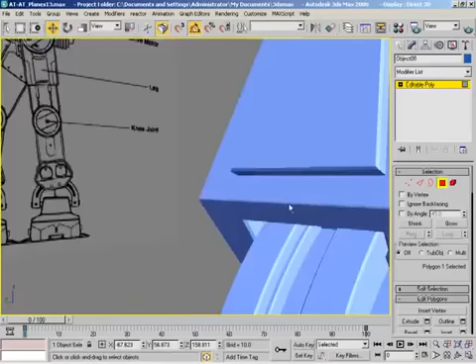Well, I can see you've done a lot so far. We have. You can see we've got the legs working all the way up there. There's actually an error in the feet that either nobody noticed or nobody's PM'd me about yet, but all the little teeth here inside the gears got shifted over to the right by a few units the last time we were playing with it.

How amateurish. So nobody has PM'd me and said, hey, there's a problem in your feet, which is pretty amazing. Not that people sound like that or anything.

They might do. So anyways, so here's what I want to do. I'm going to grab this panel, and we're going to planarize it, because I think it's a little bit out of planar. So boom, and you see a little bit of adjustment there. And this is probably not a good idea, but I'm going to do it anyway. We'll pull that out just a little bit to kind of fit things in. Looking at pictures and photos and things, let's see here, I've got my big stack of reference images, and this is actually the studio model. Now, it looks like what we've got is this great big armor plate that's more or less stuck to the side of this thing, and it comes out over the top, but it doesn't go all the way across. It just kind of cuts off right up here. So that's how we're going to model it anyway.

So in order to do this, let me get stuff out of my way. Let's grab this face and this face. I'm going to hold down Shift, pull these slightly up into the air. Clone to object is fine. I'm not going to worry about naming them right now.

I only name in paid videos. That's terrible. I'm just kidding.

Let me get out of sub-object mode here, grab this new piece that we've got, hit 2.

I've been working on the Advanced Digital Production class a lot lately, and I actually went through and named all the pieces of my model in that, and I was like, wow, I don't do this in a lot of videos, now I suddenly see why. I've heard both you and Jason lecture us so many times and name the various parts, and here you are. You should, but a lot of times, especially in videos like this, it's like, do you guys really want to sit here and watch me type names in? It's pretty exciting, I think, but I'm one of a very select few as far as that goes.

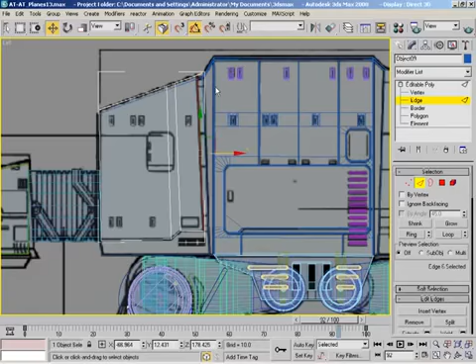Now this needs an edge. I think we could probably get away with just grabbing this and sliding it in a little bit. Now that's going to cause an interesting edge up here, unless we come up here and grab this vertex and slide it down too. And we'll clean this up just for good measure, not that it matters much.

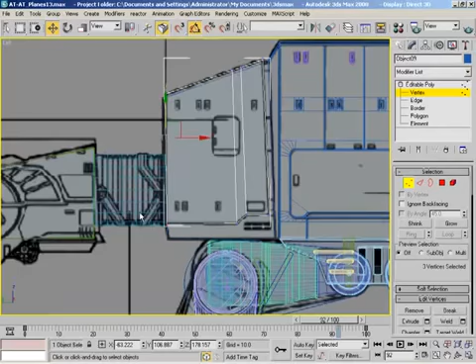And yes, that jump you just saw the viewport take was because I did try to just tap the Z key to undo, and you obviously can't do that in this Autodesk product. Other Autodesk products are available. Now, you're not going to turn this into a Maya commercial, are you? You're going to try, I can already tell. Yeah, here and there, you know. Yeah, just where it suits you.

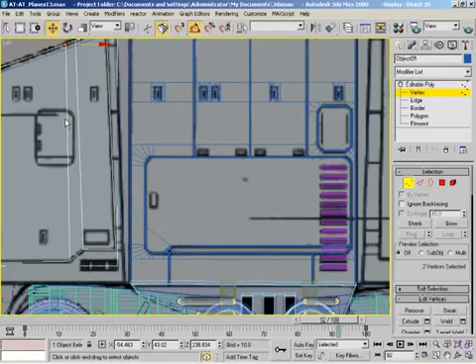Okay, now we've got this rounded door, and we actually created these earlier by doing some cuts and then some bevels and interesting things like that. But of course these edges are now going to get in the way, at least temporarily. So what I'm going to do is stop them from getting in the way for a while, and then we'll re-anchor them down later.

So let's connect these, slide down the connection edge a little bit. I'm not going to worry that it's a little bit out of whack right now. I don't think that's a problem just yet.

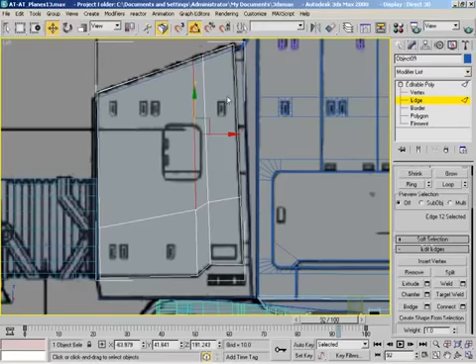Let's shade everything up because too many wires get visually confusing to me. I have a very low attention span at times. Say nothing.

All right, and I'm going to hold down Control and click Remove to get rid of those edges.

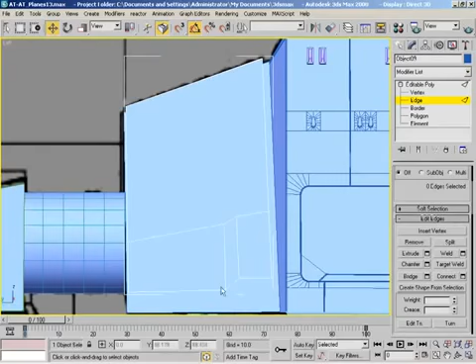Now, to create our little doorway here. I'm also interested in what that is, if that's a hole or what. It looks like just another panel. You'd probably build it on top of, like stick another shape in there, and that would work. It doesn't look anything special when you see it like that. Yeah, I was kind of hoping it was something special.

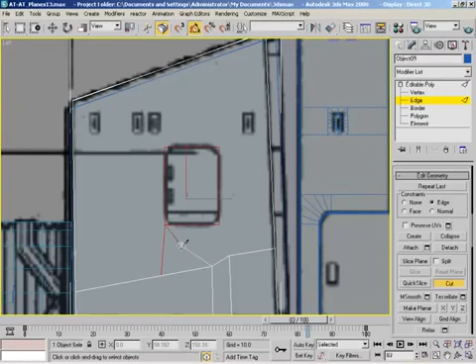Okay, well, we're going to get the cut tool. Let's see, maybe we could just start down here. It almost doesn't matter where. We're going to go to about where one of the corners would be, then to another corner, then one more corner. And we're almost done, then just click here, right click, and there you go.

Alright, so now I think with that done, we can switch over to vertices. I'll get out of the cut tool because I often forget to right click and then I keep the thing open, and that's just not good.

We're going to chamfer these by what is that? 2.19 now. 1.75. I want a number that's easy to remember because I still haven't done it to this corner yet. Can I do it to all corners at once, do you think? Is it going to mess something up?

It'll cause weirdness down there, but I can clean up the weirdness later. So let's just click OK, and then let's grab all of these again.

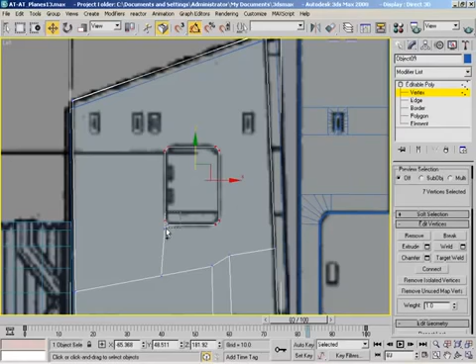I don't know why I wanted to open that. We just want to go to chamfer again. Okay, and of course, yeah, things are still looking strange down there, but we'll get to that in a moment.

Well, Ben, I'm glad you were able to make it down, even though you're just going to sit here and silently stare at me while I'm modeling, which I gotta admit is a little freaky.

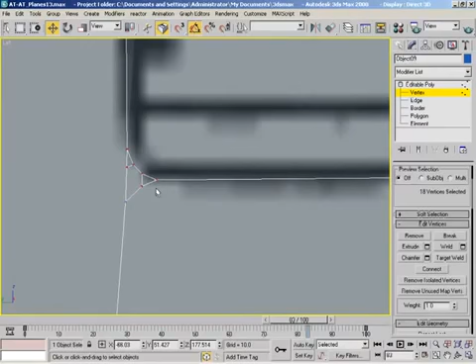Well, sorry. It's okay, you know, it's fine. There wasn't much to see as you did your thing there. Oh, for a second, I misunderstood you because of your awesome Scottish brogue. I thought you said there wasn't much to see, and I was like, oh, well, thanks. Just sit here and disrespect all of the modeling. That was going to be my second point, obviously. Of course, obviously. And thank you for that, really.

You're welcome. All right, so let's see. Let's take this and we'll remove that. And I'm sure we got a stray vertex here that we can...

Ooh, I don't want to do that necessarily. It won't let me take that one out yet. That's okay. We've got to anchor all of these corners down like what we did over here before things really start to work well for us.

For the time being, let me make sure the edge constraint is still on, and I'll slide this guy out of the way. Let's get the cut tool back out.

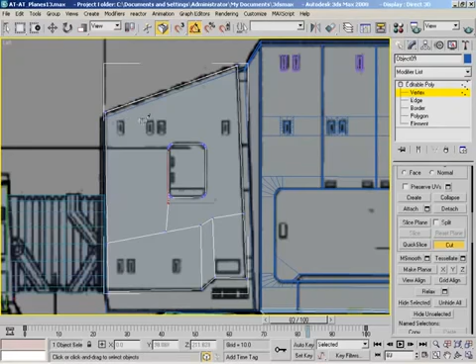Now, I don't think we have any other major cutaways. We've got some of these weird rain gutter-ish kind of things. I don't know what they're for. Maybe you can hang blasters out of them and shoot at people. I don't know. But we'll slice across here, and these will just be edges from which we will anchor points down later on. And we'll just cut this up to here, move the viewport.

And slice this across here. A little bit of an angle won't kill anybody. This all the way up.

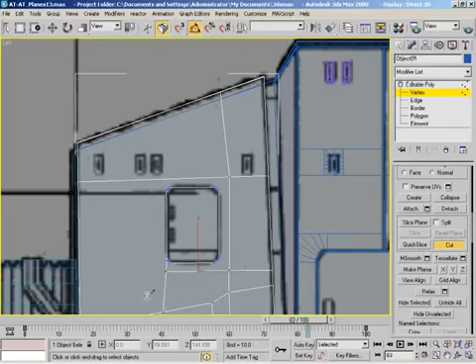So, do you get to play with Maya much? I know you're an IT guy. I am, but only by profession. Oh, so do you get to do much 3D work at all? Well, I do in my spare time. I gotcha, a fair bit of Maya stuff. Yeah, but you've got to remember that normally when I'm watching you modelling or doing something like that, I don't normally get the opportunity to jump in and say something.

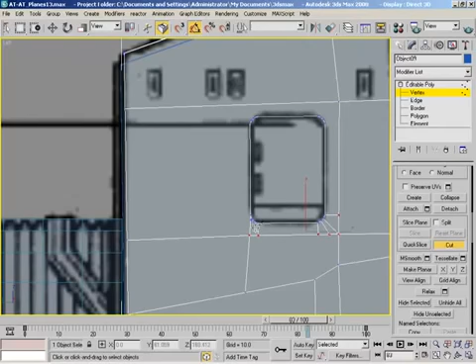I understand. Well, see, and you've got this opportunity now. I know, and you're squandering it. What a waste. You're not heckling me. You're actually being very well behaved, which is... I'm waiting for the right moment to strike. Yeah, of course, when you least expect it. I'll be there, totally understand. And here comes the Scotsman out of the corner. Wham! Oh, well, here's hoping, anyways.

So what kind of stuff have you done in 3D at all? I'm trying to get you to talk, say something. Talk to the audience, man. They want to hear from you. They don't want to hear from me.

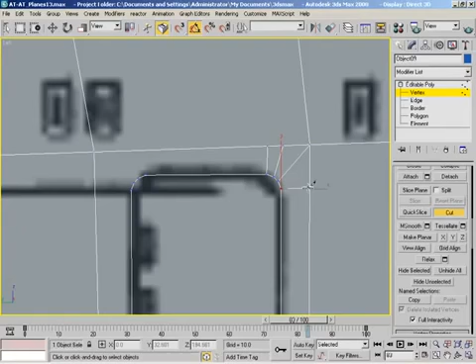Well, I did your Maya Fundamentals class. I've done most of your advanced modeling class before. Ooh, yeah, actually I'm interested. Which ones haven't you done?

Well, I kind of lost interest after the NURBS, right when it was getting interesting. Oh, okay, I think putting together that head might have been a little bit too much for you? Yeah. Well, NURBS is not for everybody, and I think they're pretty cool, but only when you need them. And if you don't need them, it's just like, oh, why am I doing all of this? Absolutely.

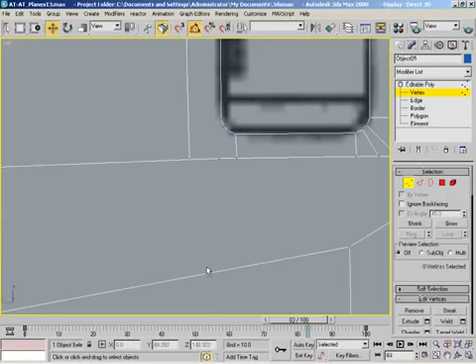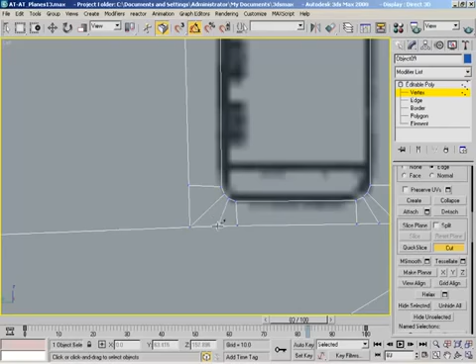I did like that those videos at least made NURBS seem approachable, at least to me. Because, man, when I first learned NURBS, no, I didn't have anything that nice to use to study from. No, it was good, because I spent a lot of time asking my teacher, so why are we doing this again? Good to turn the tables. Yeah, so now everybody gets to ask me, so why are we doing this again?

Well, you see, all right, so that's fine. We were leaving those floating on the edge of the cutaway there. Now, this line is not really there, it actually points out to something over here. And since we're not going to actually have floating 3D text pointing to the escape hatch, which would be cool.

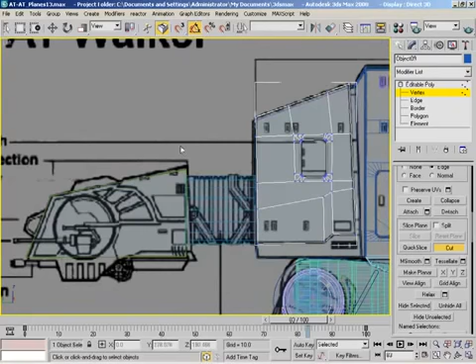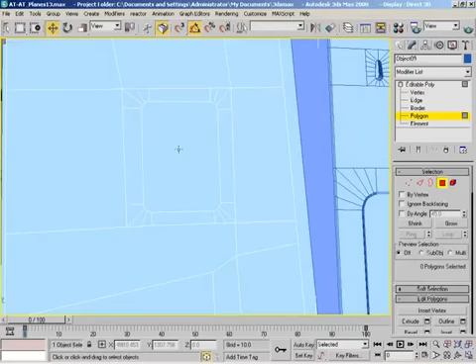So I think we've got everything we need. Let me pop over here to the perspective view, and we'll rotate around a little bit. Not bad. Let's grab this face, and let's start off with an inset, and that looks pretty good. Maybe a little less than that.

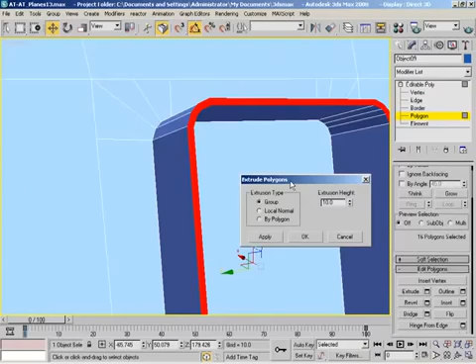And click OK. Now we'll jump over to edges, grab the edge ring, hold down Control, and switch over to faces, and do a quick extrusion. That's perfect, we should leave it just like that. Done. Yeah, pull that down inside just a little bit, and there we go. So it's sticking through to the surface underneath, but since it's really kind of inside of a groove, I don't think that's going to matter at all.

And you could adjust the spacing. We could probably actually take the whole piece and slide it out a little bit anyways, because it does have some thickness that we haven't really incorporated yet.

Now, back over here for a minute. So let's see, we've got these over here, to me they look like the funny little holes that we were chopping in over here. So it's the same principle, and unfortunately we were doing those with Boolean operations.

Oh, no, don't you even. If I have one more person from across the pond get on to me about Boolean operations. Well, let's not talk about them, make them any more famous than we have to.

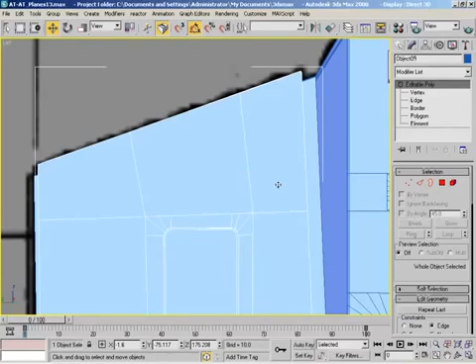But anyways, so we'll do the same thing that we did before. Let's slide this down so we can kind of see where these are going to be placed. Of course, we would have to have it lined up in such a way to make it as complicated as possible. Naturally. Let's grab this guy.

Do I still have edge constraint on? Yes, I do, and that's a good thing. So I could just slide this out a little bit. It was near enough. That's lovely, isn't it? No, it's not, we just kind of tangle up our edges in a really nasty sort of way.

Yeah, oh, I see what happened there. Okay, well, I don't want that to happen again, so let's do this one vertex at a time. Slide that over.

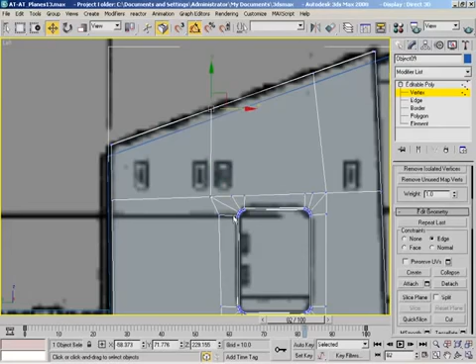It's close, close to what I want. Something right about there. This, it's on a relatively flat surface, so I don't think that's going to matter much, but I feel the desire to just double check, make sure everything's okay. I mean, it seems like it's holding up pretty well.

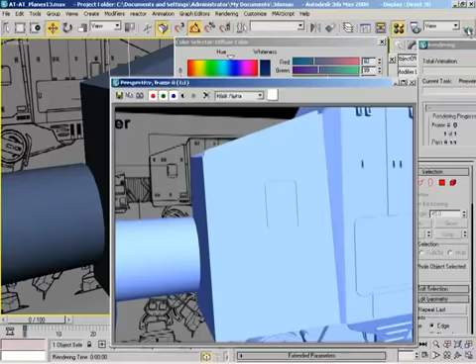I would agree. You see right there, that's all that matters. Is that Ben? Do you need to search any further? I've told you I agree. Ben is really giving his thumbs up, and I think we can pretty much move on from here. Okay, and that was all pointless what I just did there. So it was, just so you know.

All right, so we'll close that down, get back to what we were doing, which was... oh yeah, we were over here doing stuff. All I'm doing is sectioning off some polygon faces from which to do the Booleans to kind of constrain things down. Let's see, this edge will work okay. We could use another edge in here to keep things from spreading too far, really, I think is all we're shooting for.

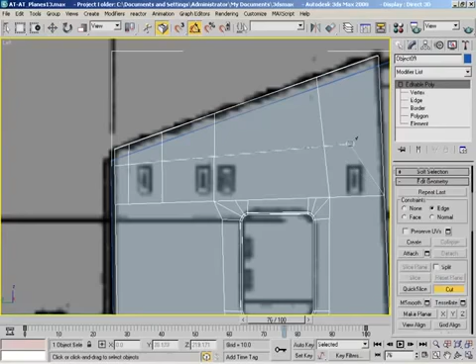If it was me, I would put another one over here on the other side of this and then just split everybody all the way down. But that's if I was modeling. Maybe not if anybody else was. You do know you are modeling, just... Hush now. All right, let's also...

Let's see, if I take this guy, I can slide him over, and I keep wanting to hit the Y key to re-invoke the cut tool, and I know that won't work either. No, it won't, not in this Autodesk package, which is going to get to be an old joke here very shortly, I'm sure. Yeah, I mean, as I say, other Autodesk products are available.

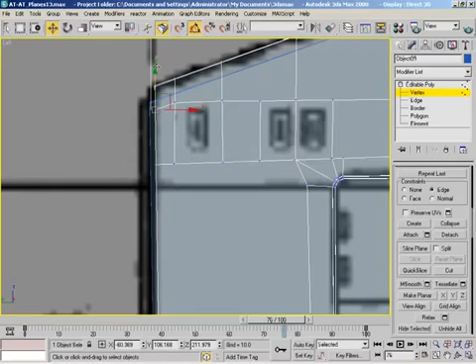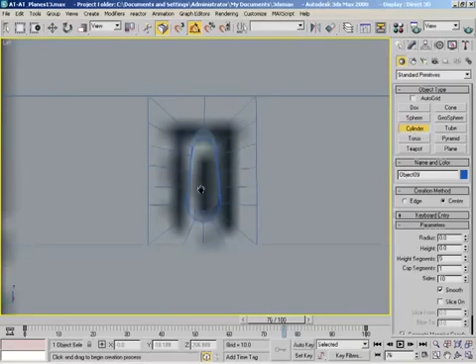Yes, available now at your local Autodesk reseller. Nah, Max is cool. You just haven't used it in a while. That's right, I'm not sure what version it would have been when I last used it. Oh really, wow, probably 3 or 4 years ago? It'd be 5 or 6, I think. Yeah, I remember when 5 came out, because I cut my teeth on version 4 very briefly, and then 5 came out while I was still learning. And I remember 6, because I was teaching at the Renaissance Center at the time, and I had to sit in on the conference call about all of the new features. And then I wasn't teaching there anymore, and then they just kind of went on without me. So 7, 8, 9, 10, 11, 12, 13, 14, 15. It's amazing they would continue releasing 3ds Max packages without you like that. You know that, wow, the sarcasm there was so deep that it actually hurt a little when it came out. I mean, there was almost some pain involved. Did you think they should hang fire and wait until your next call before they release a new version? I did, actually, now that you mention it. Thank you very much for asking.

Let's see here, 1, 2, 3, 4, 5, 6. What did I have, make a 12-sided cylinder and then just bevel it out? Is that what I don't remember. We'll do something fairly similar. I wonder if I could steal geometry and then make a bevel that looked exactly the same. I probably could if I was really clever and careful about it.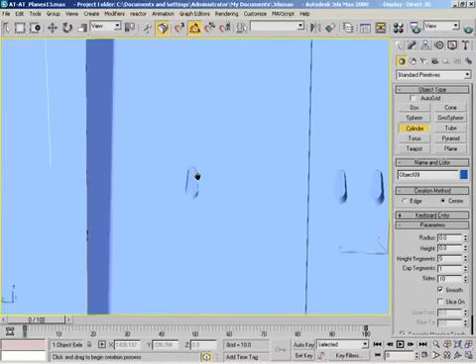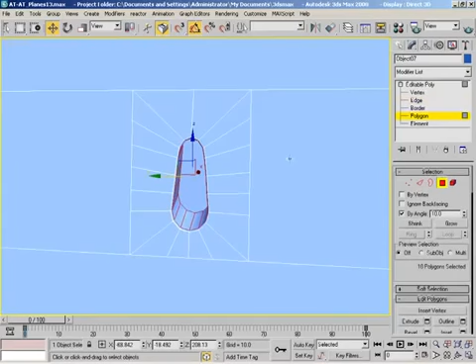So let's get out of here, let's jump over to this piece. Do I have this piece selected? Sometimes it's hard to tell in Max. Oh, I didn't mean to say that. And let's see, grab this guy, make an edge ring, and convert that over to faces, and we'll shift drag a copy out. Clone to object, yeah, that's fine.

And let's see, what do we need to do from here? We should probably flip it. That would probably be good. Oh come on, select already, would you? Thank you.

Alright, so flip the thing inside out. We'll switch over to borders, grab this border, and we'll cap it. And we'll grab this border and also cap it, just to be on the safe side. And I don't know how well it's going to like doing a Boolean with a sheet like this. I know that it works sometimes in other packages. That was really nice what it just did there. Yeah, are you impressed? I was impressed.

Alright, let's see, let's jump over and center up the pivot. Slide this over. Pull down our shading so we can kind of see what we're doing, because that's sort of important. Now we're going to have to really push this into the shape to get something close.

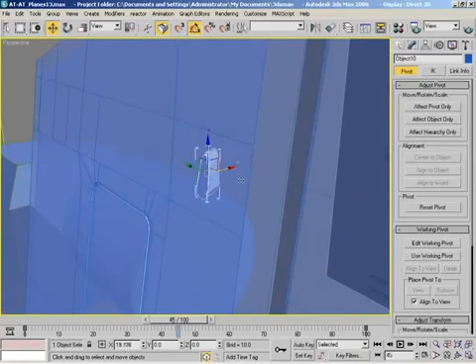And shade everything up. Make sure we haven't gone too far in. I think that just barely is going to work out.

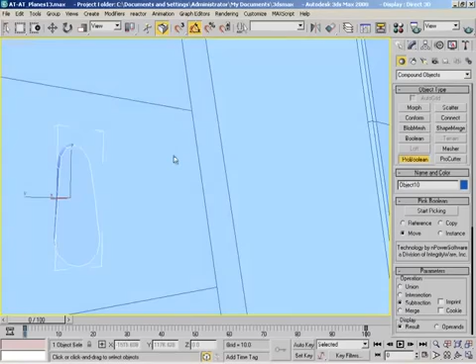Okay, so here's the moment of truth, because I have no idea really how well this is going to work, if at all. So we'll go to Compound Objects, we'll grab Pro Boolean, Wrong Object. We've already got a problem, isn't that amazing? We need to grab this piece and then do the whole Pro Boolean thing. Start picking and grab this guy, and it looks like that's actually going to work out pretty well for us.

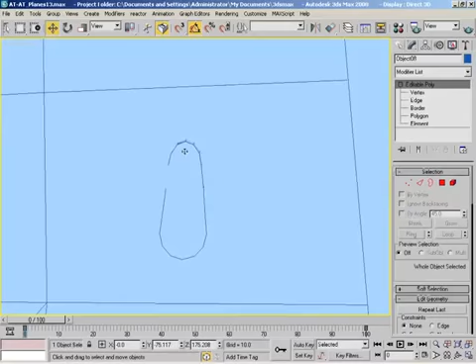The only catch, though, of course, is that we don't want to do that just yet, because we need a few more copies of this. But now that we know that that's going to work out for us, we can copy this off, confident that this was not the worst idea I've had all day. No, the second worst. The second worst idea I've had all day.

I'll be invoking the wrath of certain amongst the community, I'm sure. If you guys are oblivious to the ongoing joke, there was one time a long time ago, and I won't mention names and I won't tell a lot of stories, there was once a very severe problem that we ran into because of the use of Boolean operations. And so to this day, we still kind of make light of it and have some fun with it. Something so innocent has such serious repercussions.

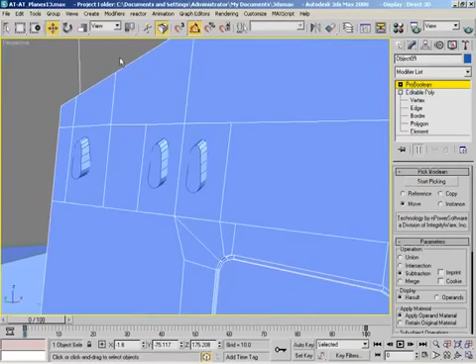Anyways, so we'll grab this guy and pick, and I believe if we get out of here, let's turn off start picking, and if we place these inside the shape appropriately, I think we can add all of these at the same time, into the same Boolean shape, and not have to do anything fancy. So we can push that in, probably right about there, and do the same thing here, and do the same thing here. And that'll probably work out pretty well.

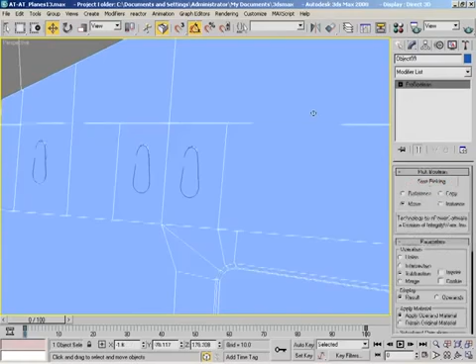Pull that out just a little more just in case, because I'm paranoid. Now if we come back over here, it's still a Pro Boolean, so start picking again. We can add that guy, and that guy, and that guy. And there we go. That's all I really wanted.

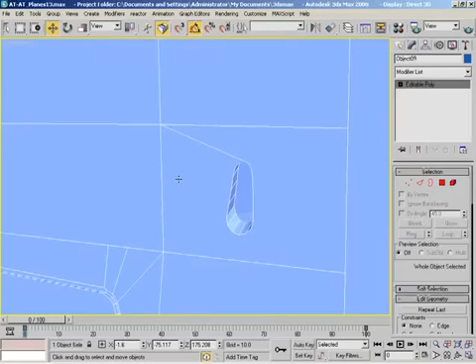So now let's convert this over to an editable poly, and we get some really weird anchoring that happens, which always happens. We just need to fix it up on our end so that things don't stay terrible. It's okay if they're terrible for a little while, as long as you make them unterrible.

This is the exciting bit where we sit here and just anchor off edges. It's amazing how these little details have caused so many problems.

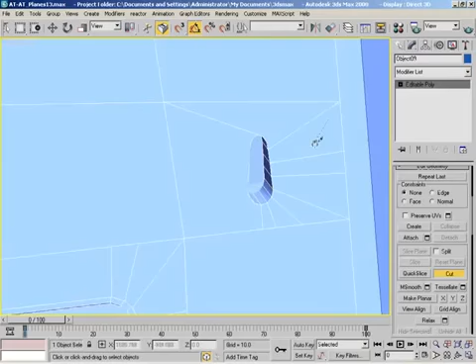Well, this is like my favorite part of modeling here, is when you get to sit here and do some silly little inane task over and over again. Oh, that's what it's all about. If you don't like doing this, you should probably not consider modeling as a career.

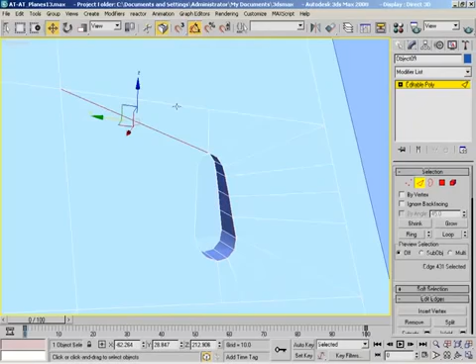After doing the amount of modeling you have, would you consider modeling as a career? You know, only if on the stipulation that I could start the job off with a holiday of a couple of years, you know? But I don't know of many folks that would hire you under those circumstances. Like, sure, I'd love to come work for you, but I'd like to go ahead and start my job with a couple of years holiday. We'll call it just an extended sabbatical, and then I'll be right back, and I'll work. Should be fine. Yeah, I don't think anybody would have a problem with that, surely.

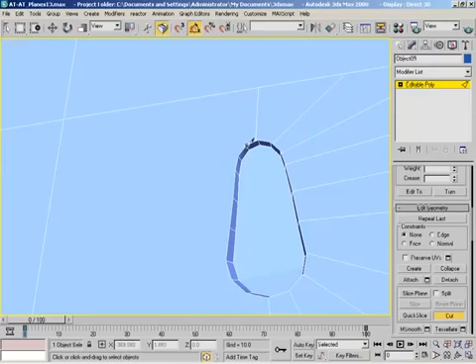Don't call me Shirley. Ooh, wow, yes. That razor-sharp wit there, brought to you by Mr. Benoit. Original, too, because I'm sure none of you have heard the Don't Call Me Shirley bit. None of you have seen the film Airplane. It's a little scene film, I guess. That's one of my favorite movies of all time. Don't we have any blow-up dolls in here, though? That's what you think, you just don't see them. Well, it's only my first day here, I'll find them.

Okay, we're going to drop that. We're going to let that go. Just for these videos. Maybe on the radio show we'll discuss that in greater detail. Do you notice that these cuts are getting really nasty?

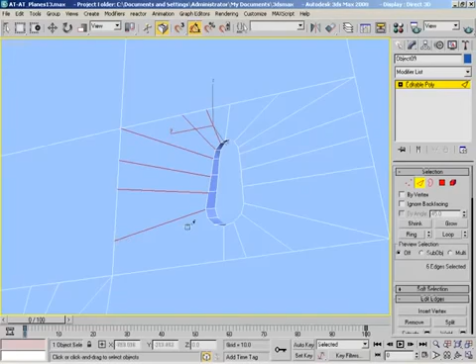It says they're on the vertices, but apparently they're not. And what that means to me is if I hit the 1 key, we're going to have all these extra vertices here that I don't need. So that's okay, I'll just keep doing what I'm doing, and then I'll weld and clean up and do all that here in just a moment. For now, we'll just consider close to be close enough. But the next time around, I'll get rid of all the extra vertices before I do all the anchoring.

Okay, so what caused all those extra vertices then? The Boolean, that's what did it. Any particular reason? Does a Boolean normally just chuck extra vertices in for good measure?

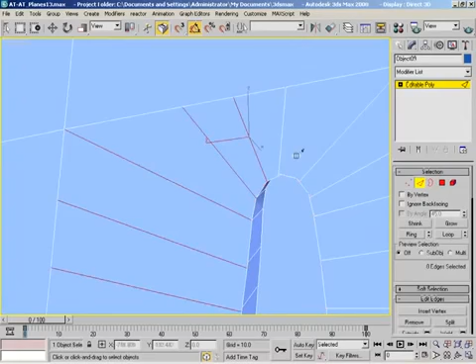Actually, yeah. That's maybe why they're so hated among some people. Well, that's true, but they're a means to an end. If you keep that in mind and realize that even though they're going to do weird things, you have the power as a skilled modeler to clean that sort of thing up and fix it on your own, it really shouldn't be an issue.

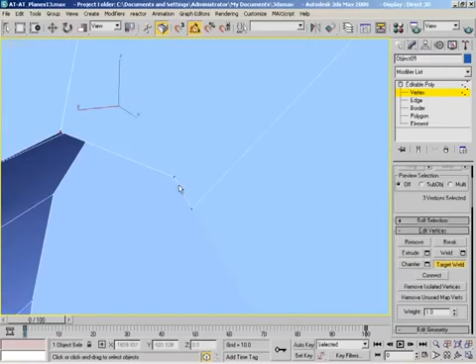I don't know what viewport I just tried to fly off to there, but as long as it's no longer an issue now. Alright, I'll just use Target Weld. I love Target Weld. I know you can get it as a plugin in Maya, but it's one of those many tools that I wish came standard in Maya and doesn't. Coming soon in a new version, I'm sure. Yeah, I can only hope. Okay.

So yeah, it's really tricky for me to get just the right amount of zoom factor in here.

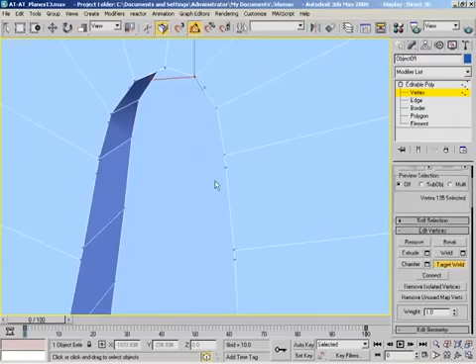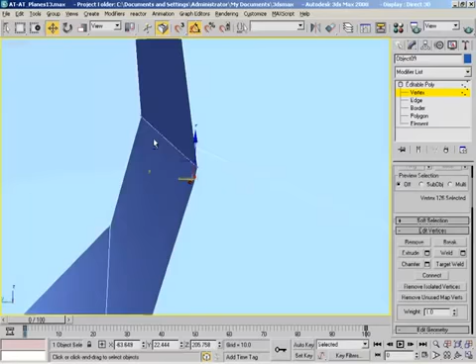Just like chamfering off all the edges, this is just the next part of it all. Because cutting all of these out to the exact same specifications without a Boolean would be a little tedious. Even more tedious than this. I don't consider this to be all that bad. It's just deciding which sort of tedious work you want to do, I suppose.

That's a good way to put it. That is modeling, though. You just summed it up beautifully. Deciding which tedious work you'd like to do as opposed to the other tedious work that you could be doing. It's the way it gives you choice. It's nice. Right, it's the flexibility of the application that I really love.

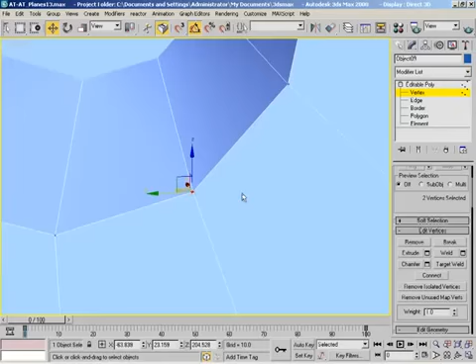Alright, I don't like that it nudged things because that could have just knocked us out of planarity. So we'll cancel that. Oh, my zooming is so deadly close to being useless. That'll work, that looks good. And this needs to be target welded.

We'll learn though. On this next hole, we'll delete all of our extra vertices before we go to chamfer, and then this won't be a problem. You can just go away.

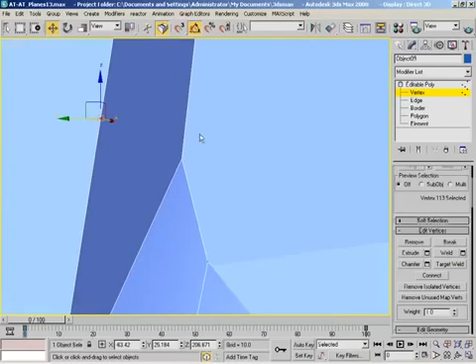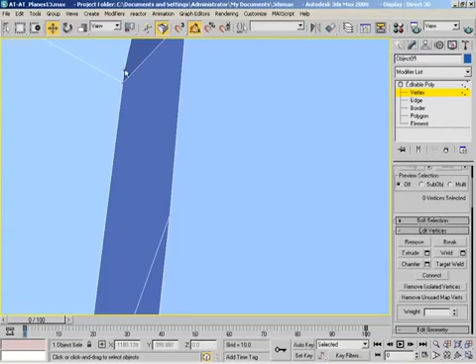And now we'll weld that one up. Well, hard to say, isn't it? Now let's take that out. Never mind. And we'll pull that out too. And I think that's everyone. Oh no, yes, did I see someone? No, okay, I just jumped the gun for no reason. I think that'll do it.

Now, what makes these all different? These got beveled, excuse me. And what's going on there? Yeah, it's a little weird, kind of problematic bevel that I must have missed last time, and I can't zoom in on it just right.

Oh, that is kind of weird. Easy fix, but weird. Close, but no banana. But no banana. Wonderfully put. Exactly right, it is close. Banana's coming. But I have no bananas today. Alright, there's our banana.

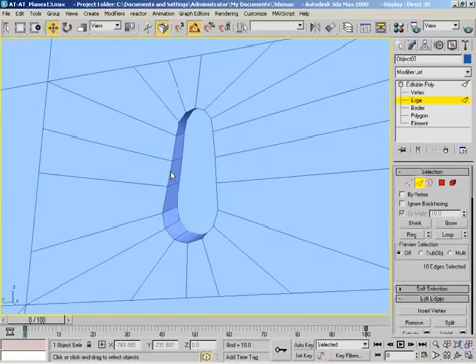Now here, we'll just grab... I gotta get on the proper object, and then this would be a much easier thing to do. Grab this, can we loop it? Yes, it'll loop, that's fantastic. And chamfer that. Okay, so that tells us we have a problem here.

What is our problem? Tell me, please, so that I might fix it. How many vertices? Two vertices right there. And it says it looks like one. So let's just hit a quick weld. That becomes one vertex, and that probably takes care of the issue. So now let's chamfer. Oh, that looks wonderful. Just pull down the amount.

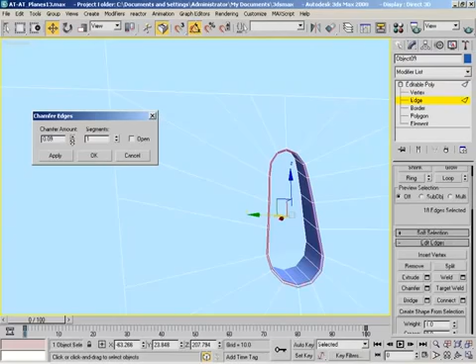Excellent, all that work just for a little tiny hole in the surface. Entirely worthwhile, yes. Well, without that hole, it just doesn't look like an AT-AT walker. No, I don't know what it is. Could be almost anything. Yeah, absolutely, it could be a model of anything without that.

Well, let me go ahead and just get the rest of these wrapped up, and then I think we will have hit a decent stopping point for this evening. So I'll see if I can hurry this along and do it maybe just a little more efficiently than I did last time.

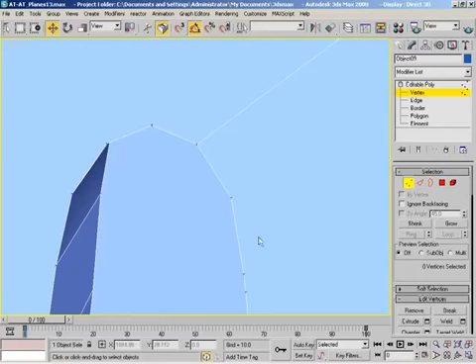I left Ben wide open for a snide remark there, and he's really got this whole unexpected thing going. As soon as he knows I'm not going to go for the obvious ones. Right, jeez, that'd be too easy. If I make it too easy on him, he backs down. That's interesting, good to know.

You'll get used to it. I will, sooner or later. This is just day one. Of course, we're very happy to have you. Mm-hmm, that'll change too. That will change too, and all in due time.

All right, I think we're set here. Let's go ahead and get our little Mighty Mighty cut tool out and cut all this stuff up.

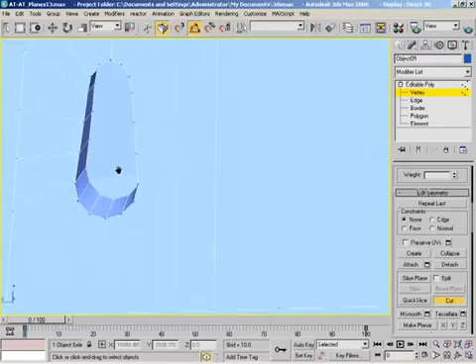So I chased you off of advanced modeling with the awesomeness of NURBS. Yeah, you didn't chase me off, I just took an extended hiatus. Took your own little holiday from advanced modeling. I can't blame you, there's 116 hours of tutorials there. And to make it all the way into the NURBS stuff is fairly impressive. Well, I modelled a pretty good car after everything was said and done, so that came out well enough.

Now, I will say that the hard surface style modeling that came out of the Lamborghini videos, I was very proud of how that turned out. And I see people on the forums using that from time to time, and I always kind of get a little proud. I'm like, hey, look, they're using it. That's just so cool to me. Because I'm sure I'm not the first person to use that technique, but I had never seen it anywhere else. So whoever else was using it, they didn't tell me about it, and I wish they had a long time ago.

Quite a few of these extra vertices hanging about. Yeah, I'm just trying to keep an eye on them, but I'm sure they'll pose a problem here in just a minute. As soon as we chamfer, we'll know if we have any extras.

Hey, look, there's new data available in the Communication Center. Thank you, fantastic news. It is. I'm very happy to know that.

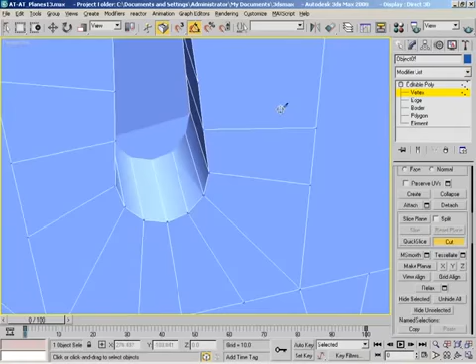All right, I think that takes care of that one. Now let's see what the damage is. And surely there's something. All right, loop. Oh yeah, already, of course. We have a winner. So I think we can just weld that and call it even.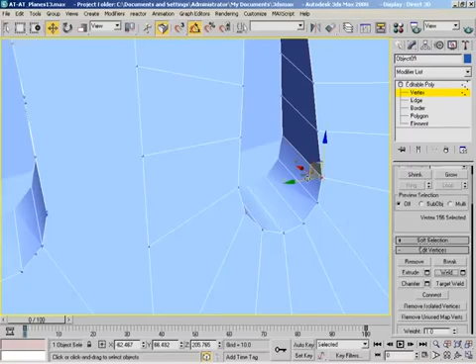It's a nasty corner down there. That's okay, we'll weld that too. Let's jump back over to edges. Try one more time.

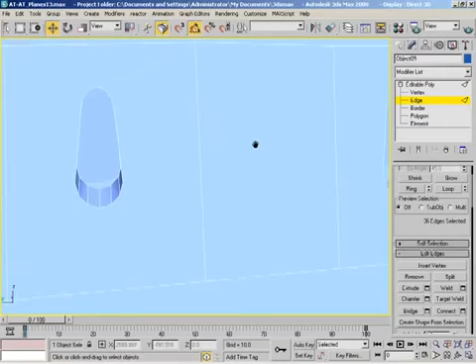Fantastic, excellent work everybody, nice job all around. Okay, so we've only got 2 of these left. I'm so tired of doing these now. I mean, like one was really enough for me, 2 was kind of pushing it. And now at 3, I'm just like, why are we still here? And the reason is because we have to be, because this is what modeling is all about. It's the little tiny, tedious details that really make everybody go, hey, wow, that's a really cool model.

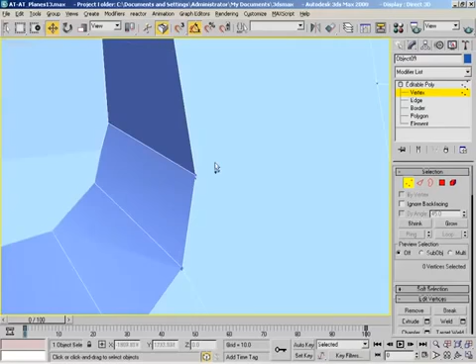Especially when you can't really zoom in on the problem areas. That's what I love the most. Does it just clip as soon as you get too close then? Yeah, it doesn't really like being this close range. It'd probably be easier if I scaled the whole thing up a little bit, but that's okay, I'll survive.

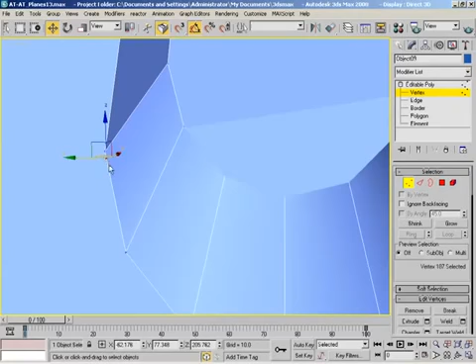Wow. It's funny, it's like one of the few, ooh, that was bad. It was one of the few videos where I'm not just rambling on about random stuff, except for talking to you, of course. Now that's been kind of fun, but you're awfully quiet again. It's like you're just sitting in wait, ready to attack.

No, it's all good, this is the first time I've done this before. Absolutely, so absolutely, he's still warming up to the whole thing. Because this is a very interesting environment, sitting here in front of a monitor, watching somebody else work in an application that you don't use. So I think you're doing fantastically, marvelous job, really. Thanks. Okay, and so sincere with it. I know, didn't you like the delivery there? Was it convincing? Were you feeling it? But no. I'll have to work on that then.

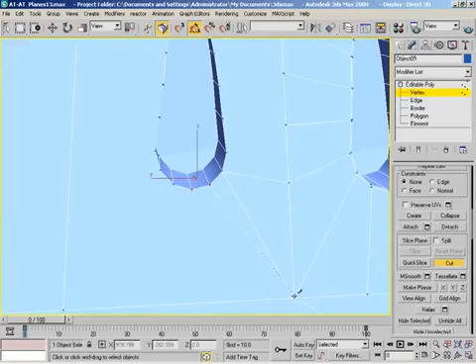All right, we'll anchor this over here. Let's take this edge and make it go bye-bye, we don't need that anymore. Let's see, back to vertices. Come down, grab the cut tool yet again. Come here, there you are, thank you. And oh, you know what, that's a little different than what I've got on one side and the other. Alright, well I can cut you there, and then you go up here.

Yeah, man, I'm telling you, this is what it's all about. It really is. It's okay, just one more of these and the whole thing will be done. I can't wait, it's kind of like waiting for Christmas. Yeah, only just 1,000 more clicks to go.

Alright, so that actually was supposed to split down here. So I'll just change that around and then I'll pretend that I did it right the first time. Good idea, I didn't see anything. Of course you didn't, you were just sitting here. Perfect, sort of, close enough to perfect.

I wonder if anybody's still watching, because by now they've all caught on to what we're going to be doing for the next several minutes. Oh, I mean, I stopped watching about 20 minutes ago. Exactly. I mean, well, I would have.

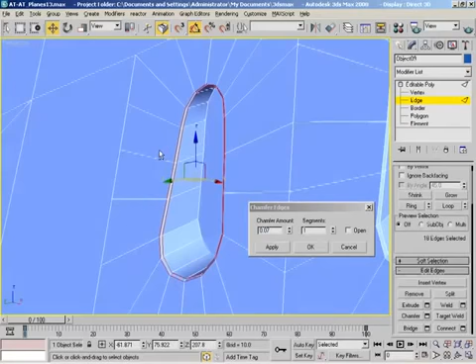Ooh, we actually got a loop that worked all the way around. Hang on, this won't work. Oh my goodness, I think it did. Wow, I'm actually in a little bit of shock. That one actually went smoothly. Shh, just jinx the next one if we talk too much.

This is going to be a disaster. Yeah, I'm going to... oh, yeah. Just millions of extra... settle down, folks. We're going to be here another hour. That's how it goes. Alright, well, let's see if I can get through this one as quickly and painlessly as I can.

That's what the details are about, though, you know. Try not to be too hard on myself. At least we'll end up with a new plate of armor out of the whole thing when all's said and done, minus maybe a little more detailing here and there.

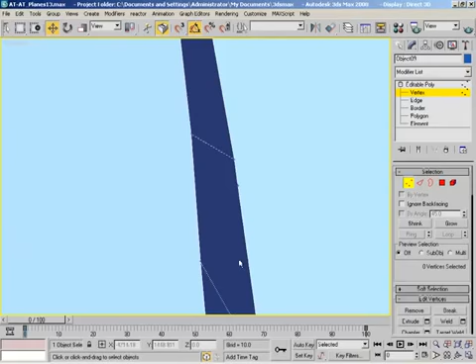And we can't get rid of that one yet, but we can target weld it in so that it doesn't gripe about it too much.

Almost there. Alright, I think we're to a point where we can just start doing our little anchor splits now. Grab the mighty cut tool, and we'll just start down here. These are kind of long cuts for this, but I just always feel better about my booleans if I anchor them out, even if these anchors all end in a flat surface. Now, if this is supposed to be rounded in any way, you wouldn't want to do this. You'd want to anchor these even further, because you could end up with some really weird pinching on non-planar surfaces if you leave vertices hanging like this. But because this is completely planar, it shouldn't pose a problem.

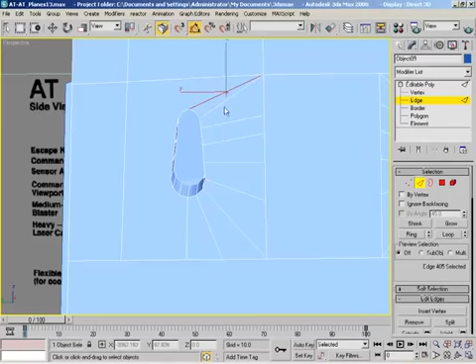I almost did it mentally. I was reaching for the Y key again. Yeah, you've got to stop it. It's hard. You use one application for weeks on end, and then suddenly have to make the shift over to another one. It's like, I don't know how to do anything anymore.

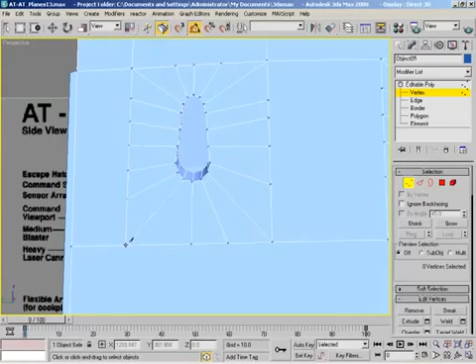I had to actually look around for the 3ds Max launch icon earlier. So you could argue that I forgot how to launch the program. That's a VTM in itself. Hello everyone and welcome, in this video we're going to talk about how you can launch 3ds Max. As long as you take it slowly, it should be fine. It'd be a bestseller, right along with our 6-hour sphere video.

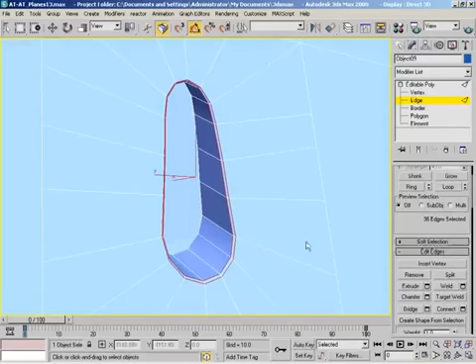Alright, let's chamfer that one, and it looks like that one actually went two in a row too. Now it really is jinxed, I'm sure. And then all these over here, okay, they were just flat on the bottom, so we can just leave them just like that. So let's get out of sub-object mode, let's deselect the thing, press F4 to put our wires away, and just double check. I think it's working out very well. Looks nice.

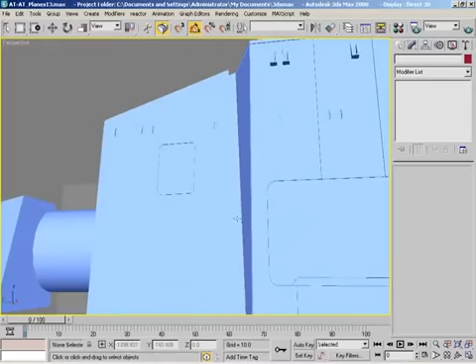So, yeah, I think we've gone a little bit over our half an hour budget for time, but all to the better, because this is looking really good. Let's take a quick look, I want to see our image plane.

Yeah, so we've got a couple more things to add in over here. Now, I am curious. Okay, these are just the funny little rain gutter pieces, which we've already got several of up here, so we can just rip some of those off, plug them in down here, so they stick out rather than... yeah, instead of go in. So that's always easier to handle. But we'll take care of that actually in a separate video.